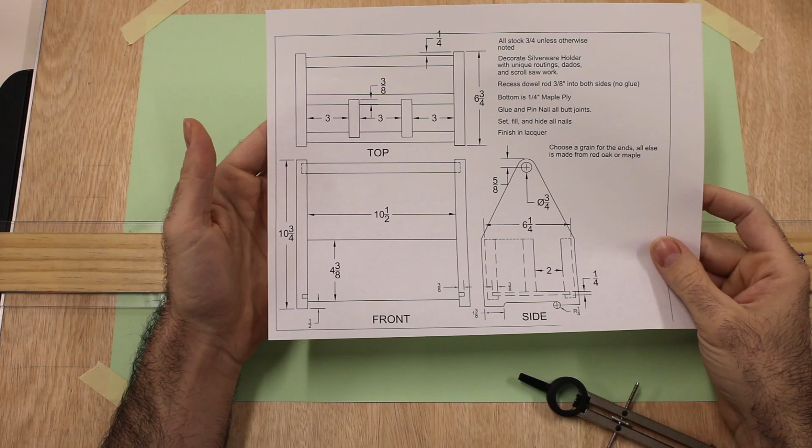So we are doing the caddy. We're doing the caddy and we're going to go down our method of making this drawing, which is your borders, boxes. You're going to erase to clean it up, details, and the dimensions.

So don't try to take all this in at once. That's a really bad way to go about this. It'll likely lead to failure. So take it one step at a time.

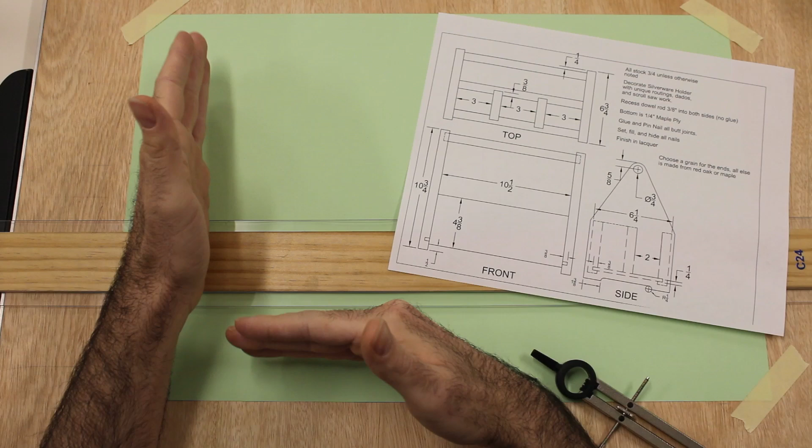So the first thing we're going to do is get our borders, and we usually do a 1/2 inch border, meaning we come off this left hand side by a 1/2 inch, we come off this bottom by a 1/2 inch, and we just create that starting position, that beginning for the whole drawing. All right, so I'm going to do that now.

Find the full scale on your architectural ruler. That's the only side that we use. The scales on the rest of this are too large for the furniture or the things that we make.

My head might get in the way at certain points. I'll try to back out so you can see, or not cover things up.

So I'm just putting down 1/2 inch lines. And as with everything, this very first step, and I'd say almost every step, but especially these first steps, make sure they're accurate, and if they're not, just erase them. That's fine. It's common to make mistakes in drafting.

I need to grab a 45-90 triangle. And now I'm going to draw my line going up the side.

So this is my first recording. I hope that you can see that line, these lines that I'm making. I think you can, okay.

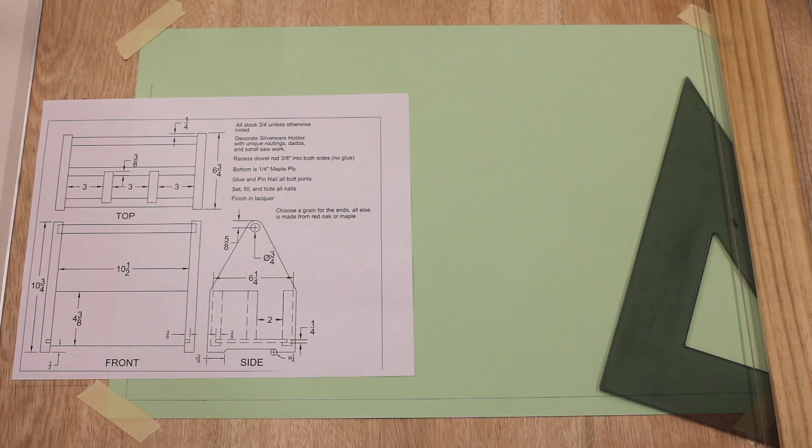And I'm going to grab me a marker and a little scrap piece of paper. Let me see here.

Before I get into this and I start to really draw everything, the way that I like to do it, the way that I find it easier for me, the way that makes it step by step so I'm not trying to juggle too many things while I'm drafting, is to do a lot of the math in the beginning.

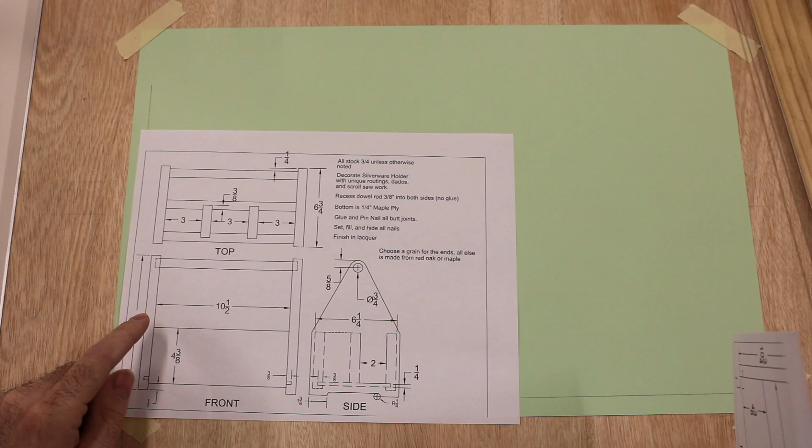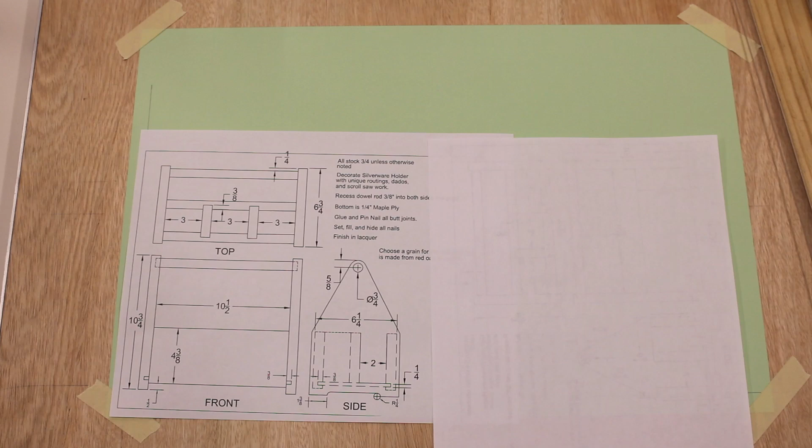So all I'm going to be doing here is this is a 1/2 scale drawing, and I'm going to be scaling all of my dimensions here. These are my final dimensions. This is how big the part actually is. So this says 3 inches here. The part will actually be 3 inches. But when we draw it, it won't fit on this paper. So we're going to scale it down to 1.5 inches, which is half the scale or half the size to draw it, okay? So to make my life easier here, I am going to go down this and let's just pull some dimensions off.

And this is what I would suggest to you too, is to kind of make some nice columns right next to each other. And you can have a scrap paper whenever you do yours.

So I think I'll go blue and red. It doesn't really matter what color you use, but I'm just kind of going to go down it. And I'm going to go through these dimensions. So I have a 1/4 dimension right here. I've got a 3/8 dimension right here. There's a 3-inch dimension.

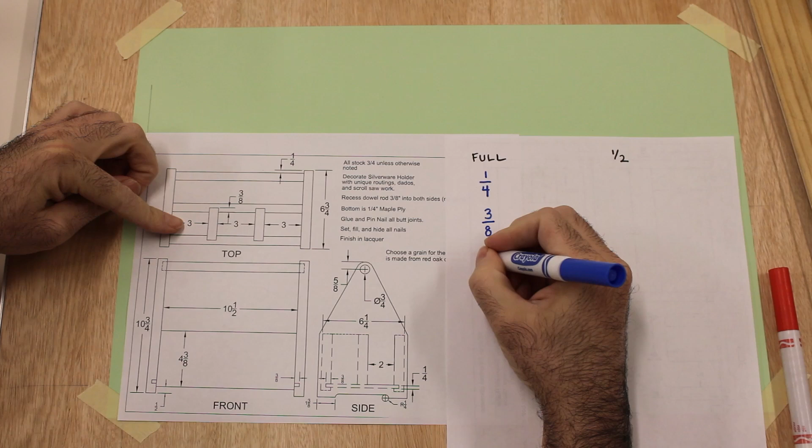6 3/4. 10 3/4. It's a 10.5 dimension. 4 3/8. The little gap on the bottom, we have a 1/2 inch dimension. There's another 3/8 here. There's a 5/8 dimension here.

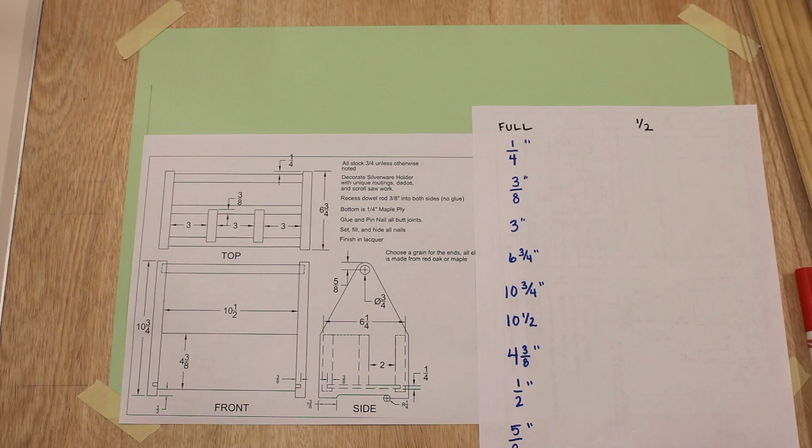And I'm going to need a little more room, just a little more.

If you're trying to juggle drawing and doing the math, even if this is something that you're good at, it's really easy to make a mistake. And once you've made that mistake, it can cost you a lot of time.

You've got to go back and erase and fix whatever that is. Everything's kind of connected here on this drawing. So what did I choose on this one? It was blue in the first column. I'm gonna go 5/8.

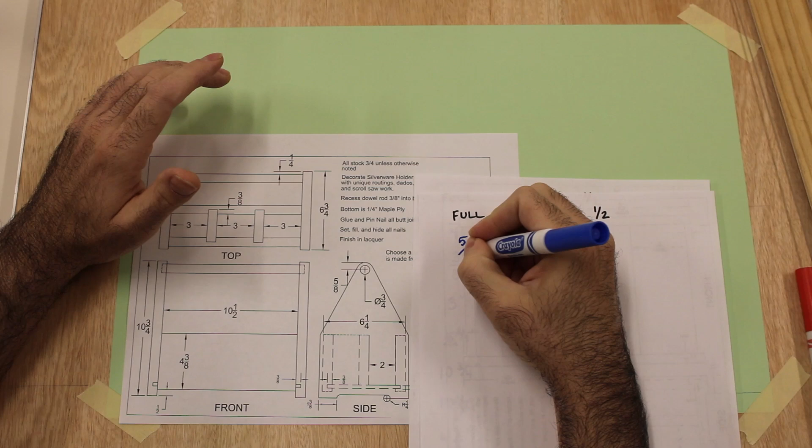That is a diameter symbol. I'm gonna keep that on here just to remind myself that was the diameter, because that's important. If you remember your compass work, you know why, but we'll talk about that when we get to it. I got a 6 1/4 dimension.

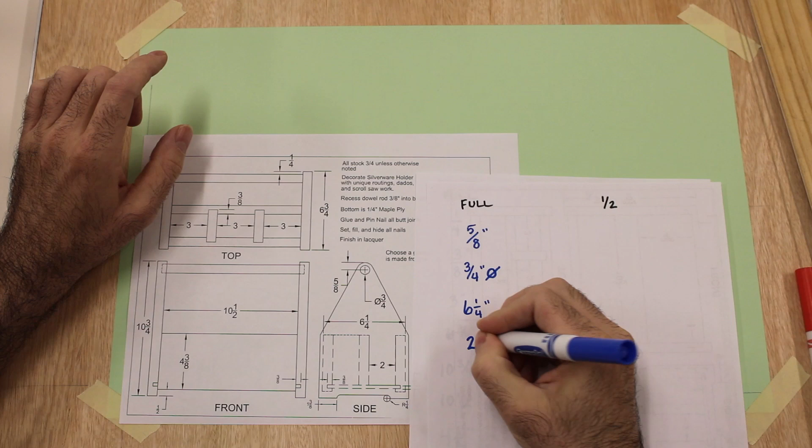I haven't had that yet. You actually start to write these out, and you can see where there's so many little points where you can make a mistake, and why it's important to kind of get this done ahead. It's a 1 3/8 dimension.

So we're just working down our fractions. We've got a 1/4. Half of my 1/4 is 1/8. 3/8, we've got 3/16. 3 inches, we've got 1.5 inches.

Here, whenever I have these mixed numbers, for me personally, I like to separate them for a second, deal with the whole number, deal with the fraction, and put them back together again. So I've got 3, 3/8.

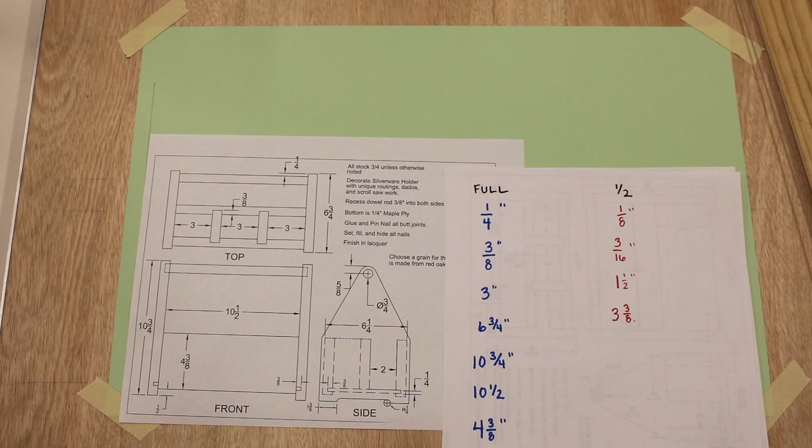So I just kind of view them here and there, even if I have to get another piece of scratch paper or write it out to the side. Maybe I'll grab an extra, we'll get a little green here in case you have to do some writing to the side.

10 3/4, that is 5 3/8. You can quiz yourself on these fractions as I'm going down, and maybe think about what they are before I get to them, and see if they're lining up or they're correct, or do you need to go back and work on that fraction work.

Ten and a half, we've got 5 1/4. 4 3/8. 2. 3/16. 1/2. 1/4. 5/8. 5/16.

Oh, I wrote the same one twice, so that's fine. We don't need to do that work twice. 3/4, we have a 3/8 diameter.

6 1/4, 3, and again I'm just splitting them up first in my head here. Half of 6 is 3, half of 1/4 is 1/8, or half of 1/4 is 1/8. Half of 2 inches is 1 inch.

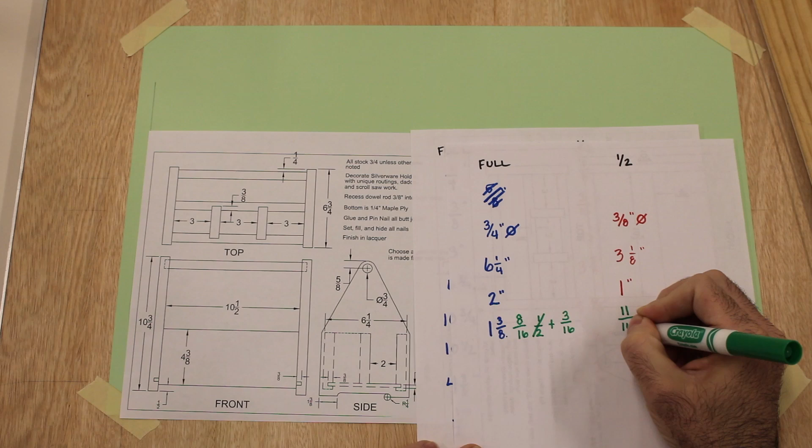This is going to make my life a lot easier, because now I'm totally focused on the drawing, and I can just come back to this sheet to pull my dimensions as I work, okay?

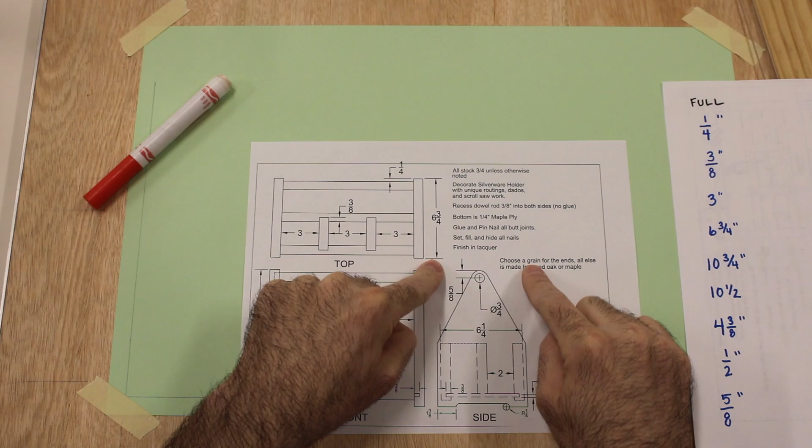And the first thing I want to do is look at this drawing. We've done borders, and the next step on here is boxes. So I've got borders, and then we're going to get boxes. Boxes meaning I just want to figure out what the outside dimension of each of these views is.

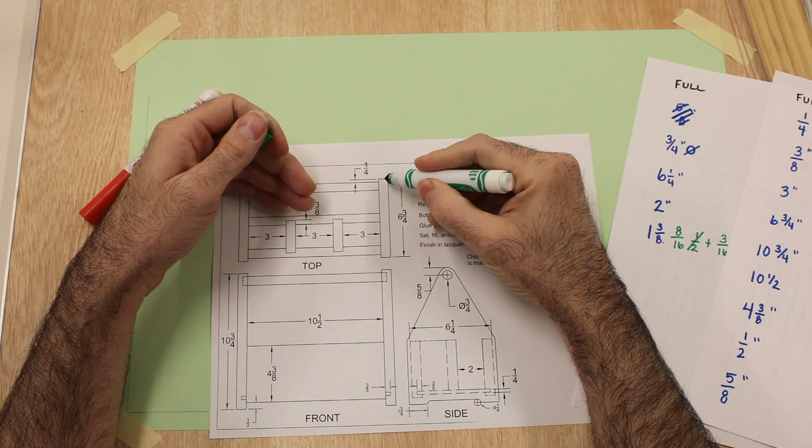Looking at our drawing, we can see that there is a height dimension here on the left. It is 10 3/4, so that's one of our first dimensions. I've got 10 3/4 tall. And then depth, I can pull from over here. It says 6 3/4. I've talked about this a few times, but this dimension right here along this edge and this dimension right here along this edge are the same dimension.

Because again, we're taking an object and we're turning it to our top view and up this way. If you were to turn that object, it would actually be better if I had some kind of box, not a cylinder like this. So I am gonna get that.

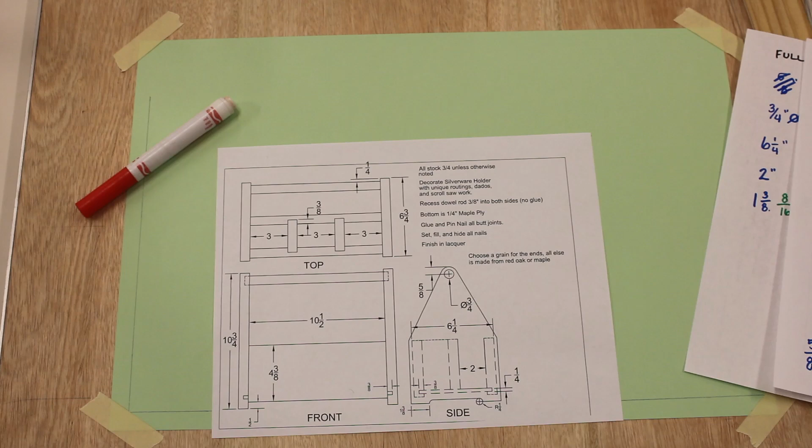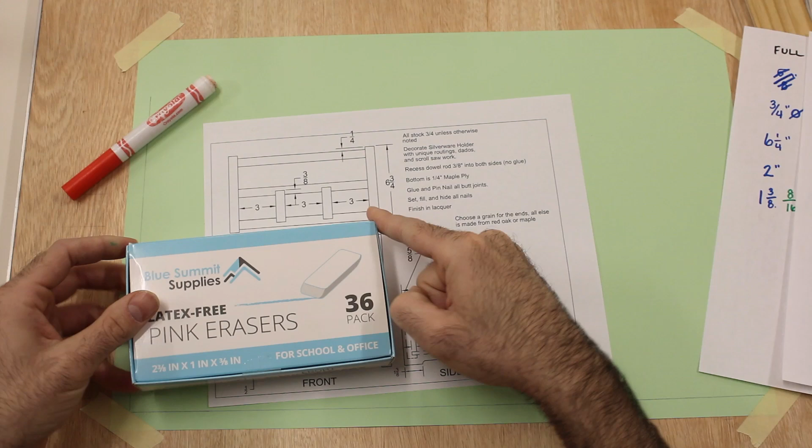This box here, we can see this would be like our height on our caddy. When I turn this, go up to our top, and I have the depth of it. How deep is this object? I'm looking down from my top and I'm looking at it, and this is how deep it is. So I'm going to put my finger here so you can see when we switch back to this front view. That was that dimension we were talking about.

You can't really see it from the front view anymore. You turn it up this way on its side, and you can see we're still on, my hand hasn't left right there. All my erasers are falling out, that's okay. So this edge right here, you can see how those share, they're the same exact dimension. It's just showing it from different perspectives.

So I've got a 10 3/4 tall, 6 3/4 deep, and get this on my top view. I can get my width right here. The last thing I'm getting is this length.

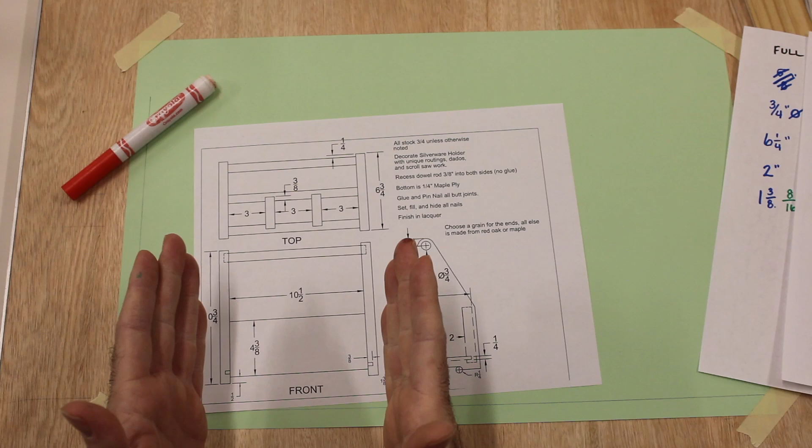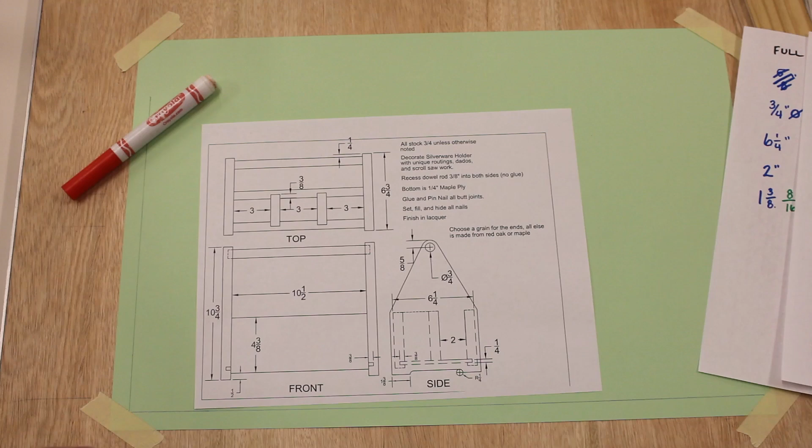It's often in engineering drawing that if math can be done, they're not going to give you every single dimension. You're going to have to do a little math to get to it. So if the math can be done, there's going to be less dimensions. It's like you take this dimension plus this dimension to get what you need. The reason for that being, if I put all my dimensions or I just keep rewriting things, it gets messy. I try to put as minimal amount of notes on this drawing, I guess, as I can, so that it's still pretty clean and you can look at it.

So this is what I do. I'm looking for the length, which is along this edge right here. I would not find length in this side view. I could find length in the top or the front, so I'm going along this way.

And if you look down the dimensions given, you're going to find a dimension that kind of gives you most of it. Maybe you find a dimension that gives you the whole length across, but my eyes go straight to this 10.5, which is from this inside edge to this inside edge right here. It's like most of the length except for the two little side pieces. So it's 10.5 plus whatever this is and plus whatever this is. And if I look around, I don't see any notes or dimensions for those.

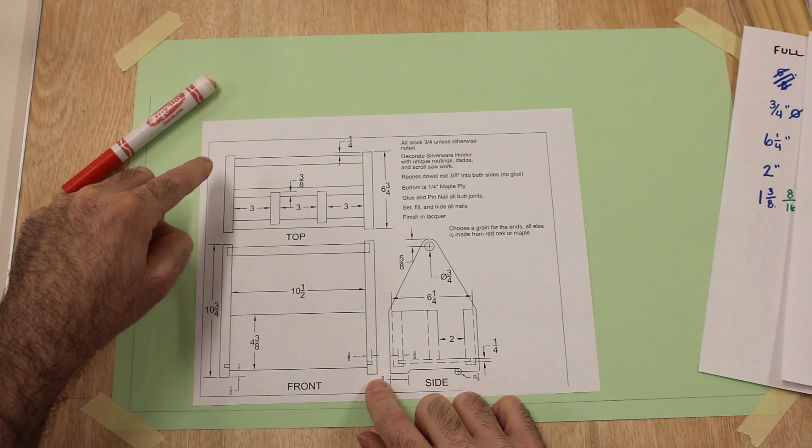But if I go up here and I read these little notes are important. They've got a lot of information about the build. The very first thing I see is it says that the stock is 3/4 unless otherwise noted. So unless it says something else, unless the thickness says something else, that piece is 3/4. So whatever you see on there. Again, it's just an easier way. Instead of putting 3/4 all over the place, just telling you that, hey, everything here is 3/4 unless the drawing says otherwise.

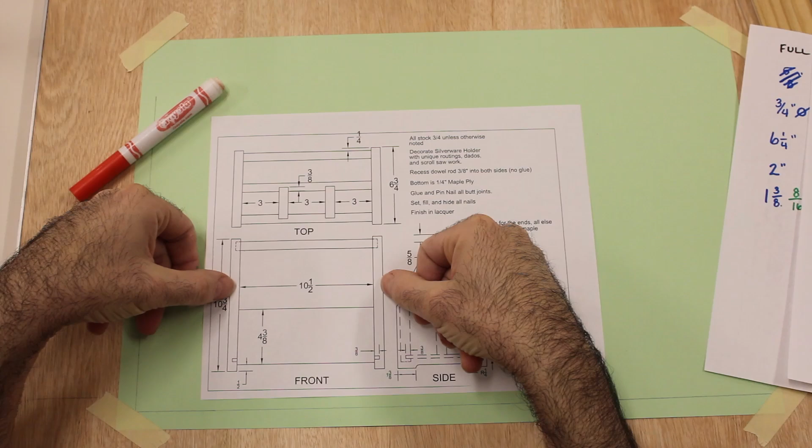So I'm going to take my 10.5 and I'm going to add 3/4 and I'm going to add 3/4. So we've got 10.5, we got 3/4, and I got 3/4. I'm going to put this in green perhaps down here. Oh, I should change the color of that one too. Still 11/16, just trying to make it clear about what is what.

So we got a little bit of math to do. I got 10.5 plus 3/4 plus 3/4. Three-quarters and 3/4, 10.5. If you can, you could add them all up. For me personally, I like to take it piece by piece. So I would either add these two and then add that one, or I'd add these two and then add that one. Just because I know if I make a mistake here, it's going to cause me a lot of grief in the end, and I'll have to go back and erase everything.

So I'm going to take 3/4 and 3/4 and add those together. So 3/4 plus 3/4 is 6/4. 3/4 plus 3/4 got 6/4.

This is an improper fraction, there's nothing wrong with this fraction, but in construction math, we don't have this larger number on top. We're always going to work that whole number out, reduce it down to its smallest fraction it can be.

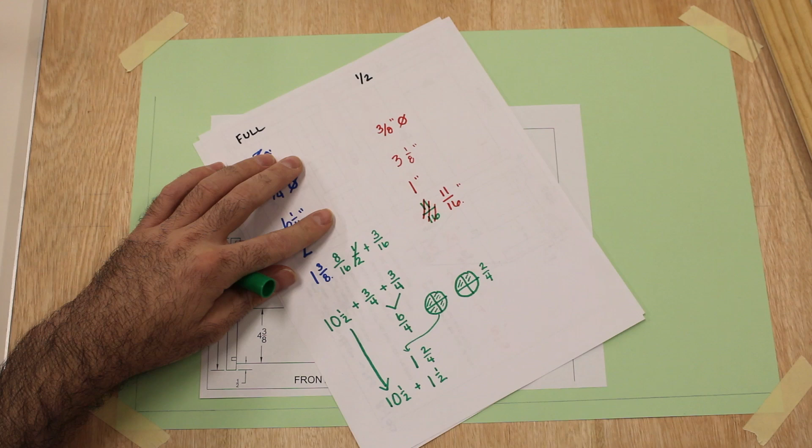So 1 1/2. Let's drop this down, because we've got to add that 10.5 in there now. Ten and a half plus 1 1/2. Personally, I like to split the whole numbers and the fractions up and deal with them separately, or if you can do the mental math straight, just go for that. This one's not too hard - we've got 10 plus 1 is 11, half plus a half. So 11 plus 1 is 12 inches.

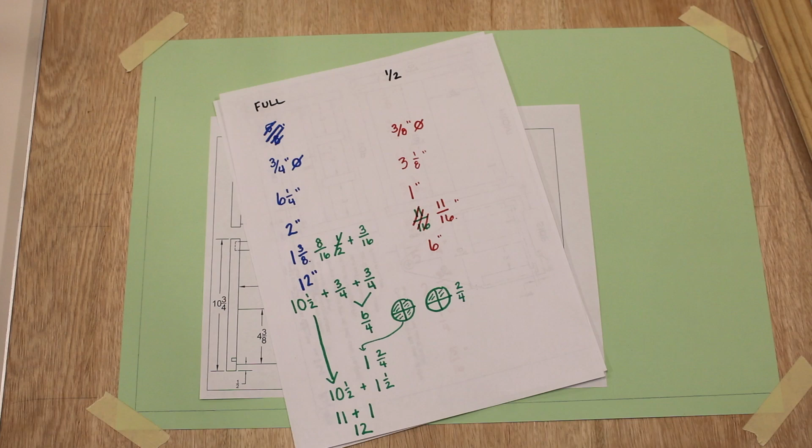So I'm going to add this onto our list here - this is 12 inches. Half scale is 6 inches. Ten and a half plus 1 and a half equals 12 inches. That told us that this 10 and a half plus this 3/4 plus this 3/4, put it all together, and I've got 12 inches from end to end here.

So after all that math, now we're really ready to start drawing. Now we can make boxes because I've got my 3 dimensions: 10 3/4, 6 3/4, and my 12 inches.

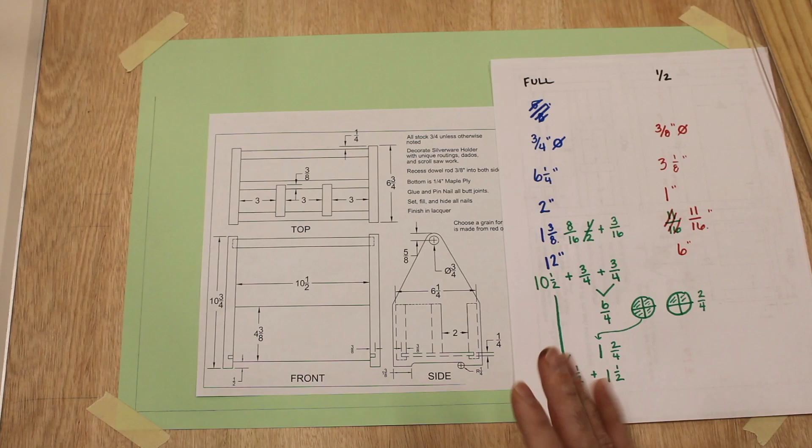One of the bigger mistakes I see is jumping in way too fast with no plan - meaning I didn't do all this and I'm already starting to draw everything, and I'm super confused because I'm trying to do math at the same time I'm drawing, or I've already messed up my thing. Get all of this mental math stuff, get all the math done first. Then come over and make your drawing.

Ten 3/4, and my chart's a little off camera here. Let me see, well, I could try to pull that in there. I've got 10 3/4, it's 5 3/8. So I'm going to start with that first. I'm going to make a line at 5 3/8 of an inch.

Small detail - my tape was coming up at the corner, and I can't really see where the corners come together. I just need to fix that real quick. These are small things that might happen to you. Slow down to speed up - get it done right so you don't have to redo it. Take the time to fix up little mistakes; they will help you. So we're right here, and I'm going up 5 3/8 now.

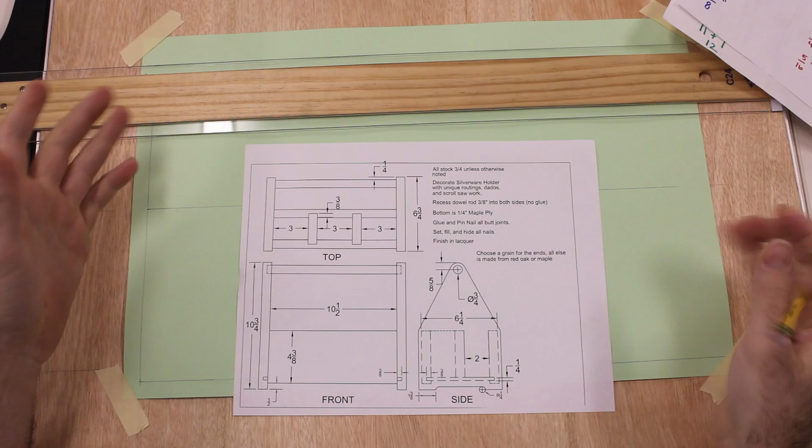Okay, so we've drawn a line across here at that 10 3/4 mark, and we're going to get the other sides of our box done up. I'm going to do the width here, which we determined was 12 inches. On the half scale, that is 6 inches. So we're going to come across here 6 inches and lay that dimension down. Make sure you've got the right side of your ruler - it's just the standard side.

So I'm ticking that off at 6. I've got a little mark here at 6. I'm going to draw this going up all the way, but I also need a 1 inch gap between my front view and my side view. So I'm going to go ahead and put that tick mark on there too. I've ticked it at 6, and I'm going to tick it again here, 1 inch over, and I'm going to draw those both at the same time.

Oh, got a little mistake there. I'm just going to go ahead and fix that.

If my head gets in the way, I'll move it so you can see. I do have to kind of lean in here a little bit, get close, and find my measurements. So 6 inches, and then we have a gap, and then we have our side view.

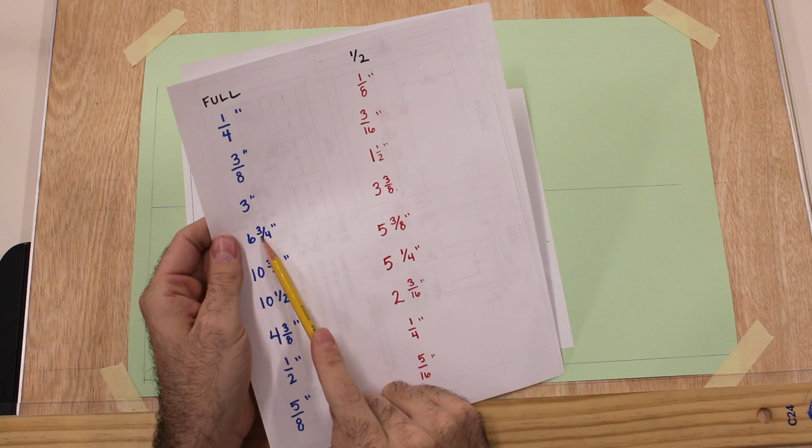So here's our side view, and we found that was 6 3/4. And we go back to our math here that we filled out, and we've got our 6 3/4 on the half scale is 3 3/8. I'm going to scoot that over if I can get this piece of paper up. Set this over here, 3 3/8.

It works in your benefit to remember that this side and this side are the same dimension, because now I can come in here

and take that. Oh, that's actually incorrect. I've got to put my 1 inch gap between my parts here. I tried to put the 3 3/8 in there to start. I'm going to go with my 1 inch gap.

I'm going to go up 3 3/8. This line's not long enough, so I'm going to come in here and extend that just a little bit, go up a little bit higher.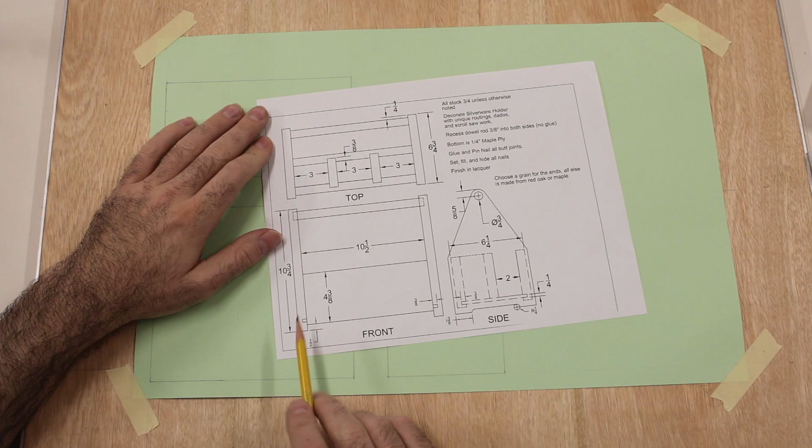So I take my 90-45 triangle, my T-square, and draw vertical and horizontal lines going into the other views. I'm going to start with the sides, and here's our sides right here — they're 3/4 of an inch thick. We're working a half scale, so that's 3/8 of an inch.

So I'm going to come in here and draw over 3/8. I'm going to draw from here over 3/8 and make our two sides, which you'll see in the top view — I can carry that up, I can carry it into the top view.

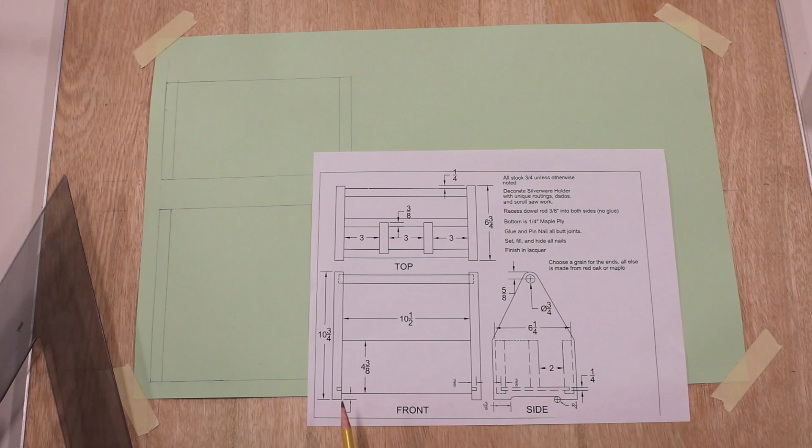Okay, and now I'm going to add in this 1/2 inch gap below and the 4 3/8 above that. So just working my way around, putting in as much as I can, and I'm going to add those lines very lightly into the side view as well, because they do come up later. But I'm going to put it on pretty lightly because a lot of them are going to get erased.

So this 1/2 inch mark here and this 4 3/8, I'm doing the bottom and then the height of the side — so 1/2 of an inch.

Make that tick mark right there, and I'm going to go up 4 3/8 from there. The way I'm going to go about that actually is I'm going to line up 4 7/8 down here in this corner. I mean, if you just want to measure from here 4 3/8, that's fine. I find it's good to have them both kind of lined up one after the other — it helps make it just right.

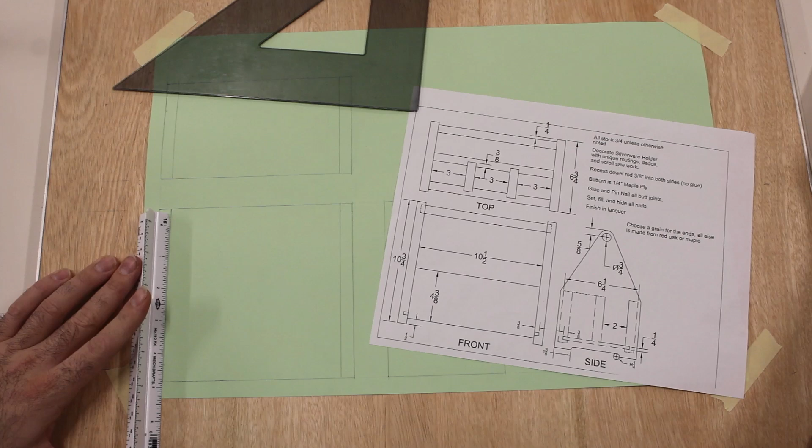And oh, I'm forgetting one thing — oh, and I forgot two things actually. This is easy to do, let's see if you get distracted for a second. That's why we split all these up.

It's a 1/2 inch, but we're going half scale, so we need to put our 1/4 inch right here. And then it's 4 3/8 is 2 3/16. So I'm going to correct this now.

If this happened in your drawing, just go back and fix it — 2 3/16. This here's 4/16, so 2, okay.

So I measured up 1/4 of an inch — got 1, 2, 3, 4. And I'm going to go ahead and go up to, from that 1/4 of an inch line, I'm going to go up another 2 3/16. I'm going to mark a line, and I need to get rid of that 1/2 inch line that I made incorrectly there.

Again, it happens — just pay attention to your details.

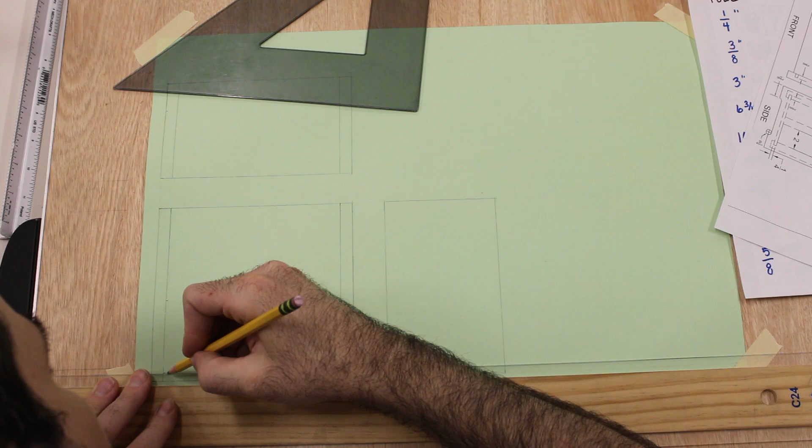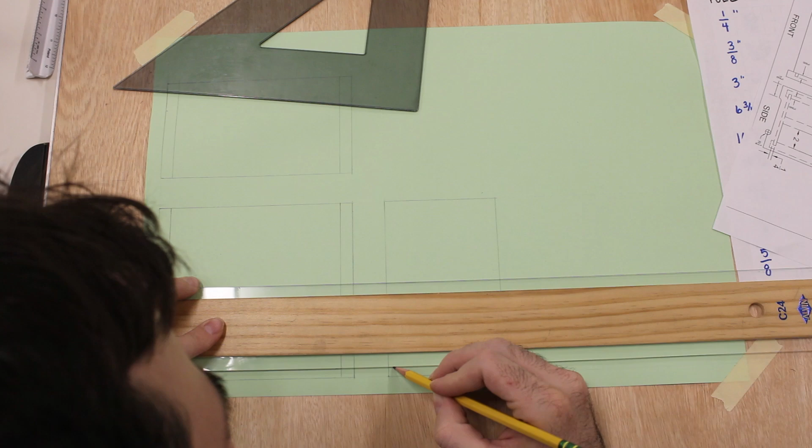I'm going to very lightly pull them over into this view. I should have gotten this one at the same time, but I didn't. It's okay, I'm just going to line it up and very lightly draw it over into this view.

So from here we really have this dado on the bottom, and then we have this dowel rod, which if you remember this drawing, is easier to draw in the side view and then bring over.

Okay, so we're going down 1/8. I made a tick mark right there at 1/8, and I'm going to tick mark up from 1/8.

Some of you might remember the strategy of doing this little 45-degree line. If you do use it, I'm not going to do it in this video just to make it simpler. We're just going to measure and mark all over the place. So I've got that 1/8 mark, and then I've got my two outside dividers here that I'm going to draw in. All stock is 3/4 unless otherwise noted here in my notes.

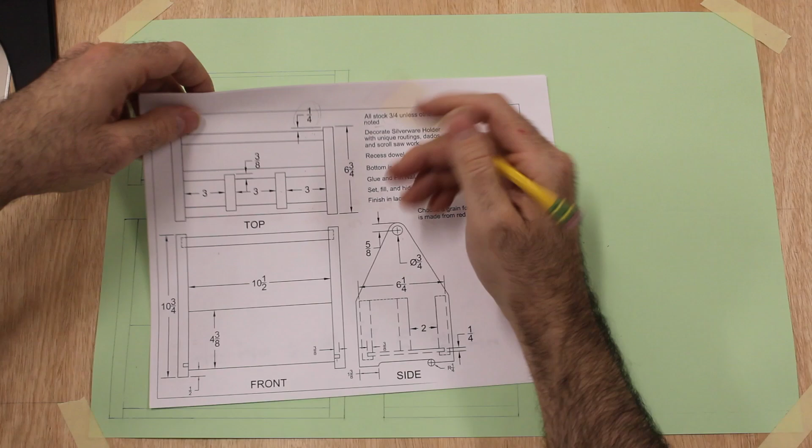So this piece and this piece here are going to be 3/8 of an inch thick. So I'm going to mark that now down. And to be clear where I'm going from, it's not from the top, it's from that line I just drew down. So I went down 1/8, and then I'm going to mark here 3/8 down from that line.

Next step is sometimes a little confusing for students. They don't know where to put this one right here. So this divider is in the center, down the middle of that top view.

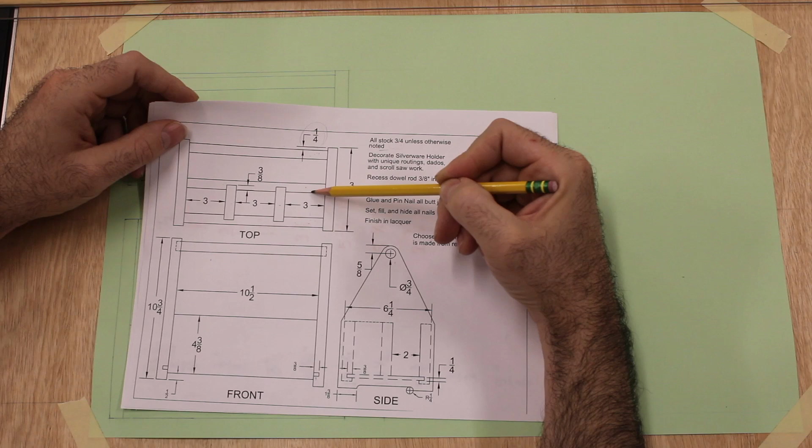And we can do it two ways. I kind of prefer one more than the other. If I look at my views, I can see there's a 2-inch gap between my outside divider and my center. So this is a 2-inch gap here on both sides. So I could measure up 2 inches, which half scale, that'd be 1 inch, and mark that down. Just to get it a little more accurate, I like to go down the middle and go to this 6 3/4 dimension and mark the center, and then mark my middle from that.

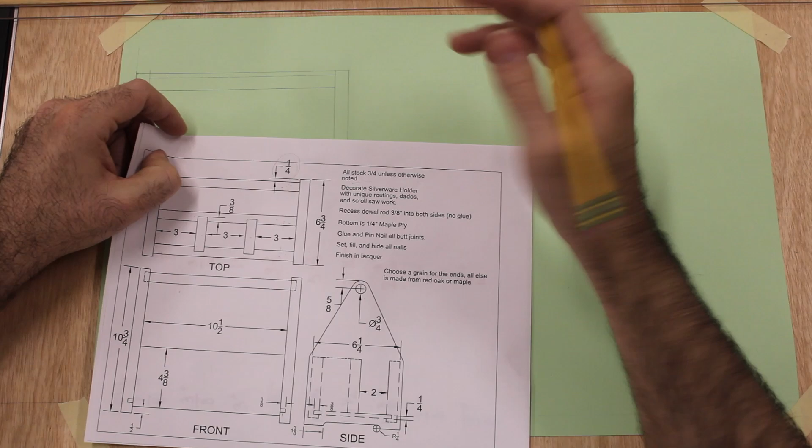So there's more than one way to get it done. I'm just going to show you the way that I prefer. So 6 3/4 here, that measurement, we're looking at our math here, 6 3/4, that is 3 3/8. But we're going to find the middle of that. So the middle of that is going to be, oh, we got a little more math to do here.

And I like to split these up. I always do that with my fractions. 3, half of that is 1 1/2. And half of my 3/8 is 3/16. I'm going to convert this into 16ths, and then I'm going to add it back together again.

I really prefer to show all my work with my math just because a little mistake will cost you a lot, and it's kind of better to get all these out. Especially with fractions, I feel like they're better done on paper than mental math. If you can do that, great. If you can't, don't be shy about putting it down on paper.

So that's 1 and 11/16, 8, 9, 10, 11. So we've got 1 and 11/16. This is the dimension that's going to be the middle of this right here.

You may have to adjust some things on your table. 1, and then we have 8, 9, 10, 11. Okay, and then I know I'm going to need this midline later, so I'm going to bring it over here and just go ahead and do this both at the same time. 1 inch, and then we have 8/16, 9, 10, 11.

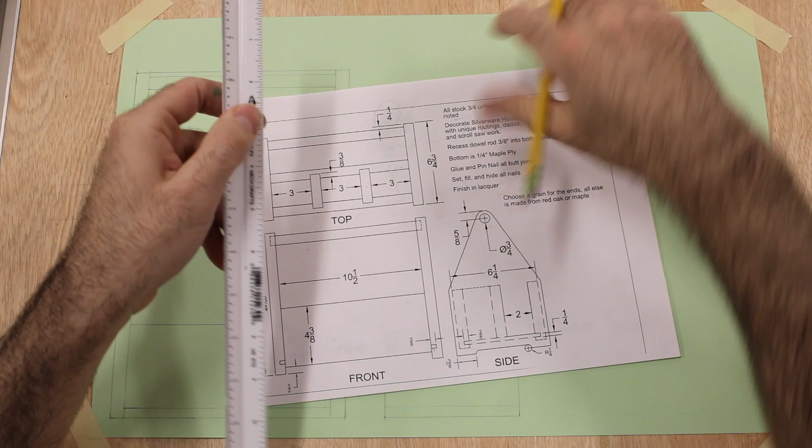Tick that off right there.

I wish I had more time to zoom in on some of these views. I'm just trying to get this done before the final so you'll have something to look at, something to study if you need it. I know explaining some of these things might be a little confusing, so I'm trying to do my best about explaining how they go down. I hope you're able to see in your head what I'm explaining, from this kind of backed out view on the camera.

I had a midline here, and then I've centered 3/8 over the top of it, and now I have a middle, a center right there. So we're not doing too bad. Once you have those boxes up, it does start to move, and once you have this up, those boxes are what's critical.

So we're gonna get this now, or whatever you're gonna get. The little dividers - we've got the smaller dividers, they're 3 inches between each other. So I'm going to work in both ways here. It says 3 inches, half scale means we're going 1.5 inches on either side. And then we have 3/4 panels, so we're going in another 3/8 and mark all of that.

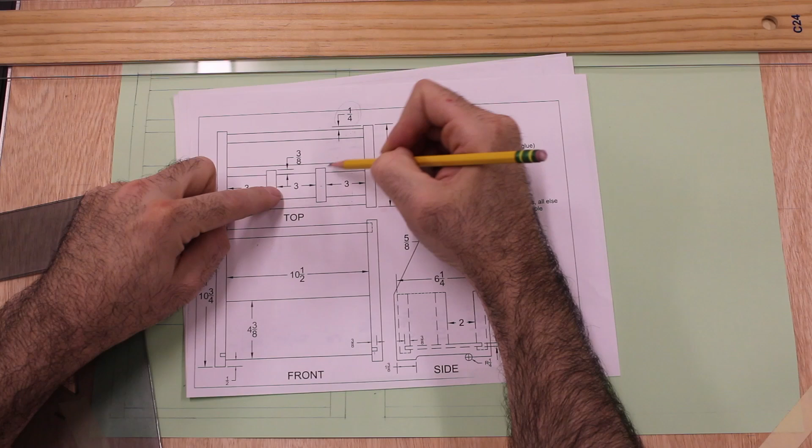So we've got those put in pretty quickly. The next thing to do is the dados. You remember these short dividers, they dado into the long dividers, and you can see here it's 3/8 of an inch. So I'm going to go in here 3/8 of an inch all around.

So if you're kind of putting some things together here, we made a midline here right down the middle of that panel. That panel is 3/4, so this 3/8 line right there would come straight to the middle of this one. Well, we already have that mark - there's a marking here for that middle. That's kind of why I like doing the middle here too, it makes it a little easier.

So that 3/8, I'm gonna line my T-square back up and mark me some lines here at that 3/8. This one down here I'll have to measure. Dado's in 3/8 of an inch, I'm gonna measure down my 3/8, which on our draft is half scale, so we're going down 3/16. We're doing our half scale down and kind of connecting this all up.

So I gotta find the middle of these two panels, draw some lines going across, and then pull the divider lines up to connect to them.

And I'm just using some of the old lines I had there. I already had those 2 tick marks done for the middle, see how quick that is since we already had everything finished. Now I'm just going to come down here and measure 3/16 of an inch.

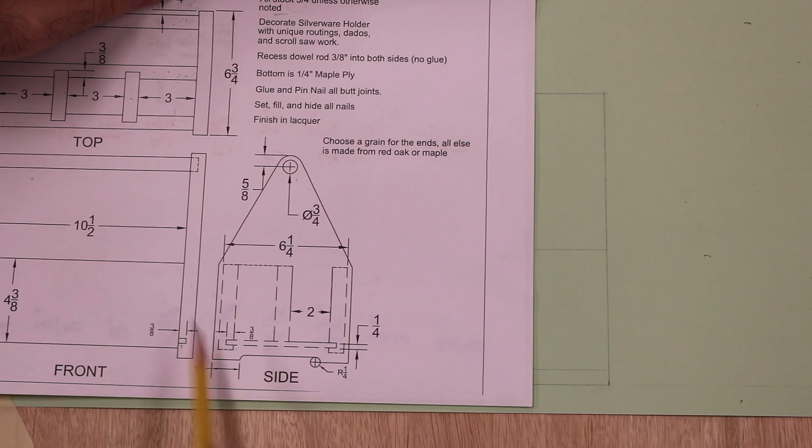We're still working on details. So we're going through - there's a lot of lines going on here, and if you try to take it all on at once, it's going to be really confusing.

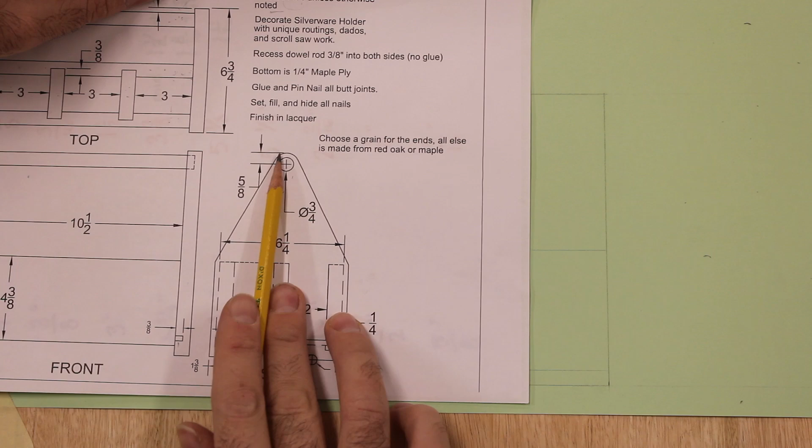So let's break it up and first start with, let's get some kind of circular something going on up here, and we'll work our way kind of down on this piece. So that's where your dowel rod goes in, and you also got that little semicircle shape on top.

And this is compass work, but you need to give the compass a center point, of course. It needs somewhere to stab down and somewhere to put the lead onto to swing it around. In our drawing here, it's got this 5/8 dimension, and it also has that line right down the center, which if you look back, you remember we ticked that mark.

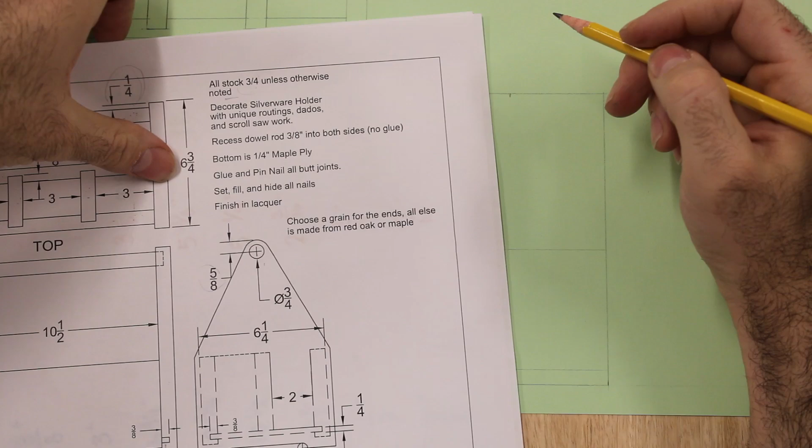We found that center when we did it up here in the top view. It's also here, so I already had one that I just put in there to use for now. I'm going to extend that down just a little bit, and then I'm also going to put this 5/8 - what it's telling you is not the 3/4 circle, but this semicircle here. I hope that's focusing. This semicircle here is 5/8 down to the center of that, and then both circles, if you see those two circles there, they both share that same center point.

So the 3/4 diameter is going to go there, and this 5/8 radius circle is going to go there. It does you well to kind of keep up with who's who and whether you're working with radiuses or diameters. It might be smart to write some things down and say, hey, this is what this is. Or take it one step at a time. Don't rush through this part.

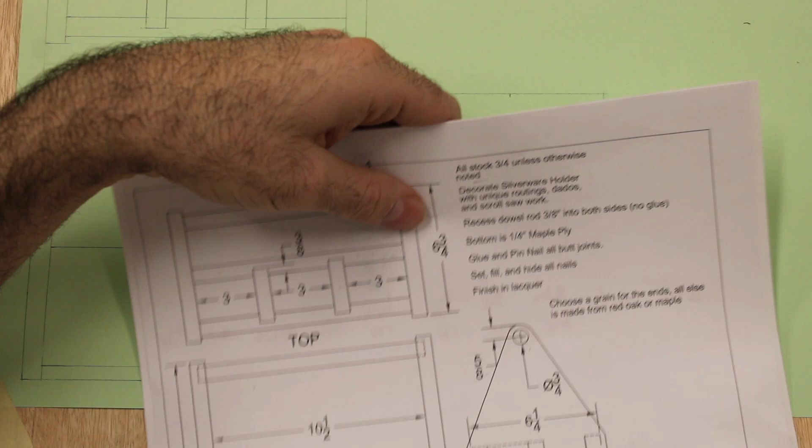So 5/8, we got 5/8 down. We're working in half scale, so that's going to be 5/16. So that's what I'm going to do, is just get my crosshair set up.

Okay, so I got 5/16 down, got that center line, and now I have a central circle to go onto. I'm gonna go ahead and start setting up this compass and drawing this half circle here. So I'm gonna stab this down in that center point, and I'm gonna line my lead up with the top where the center line meets the top, because that's our 5/8, which it's 5/16 in half scale that we're looking at here. So I'm stabbing this down.

If I can kind of hold that in such a way so you can see. So now I'm just gonna go, oh, and that might do that. So we get those halves right there, or that half circle.

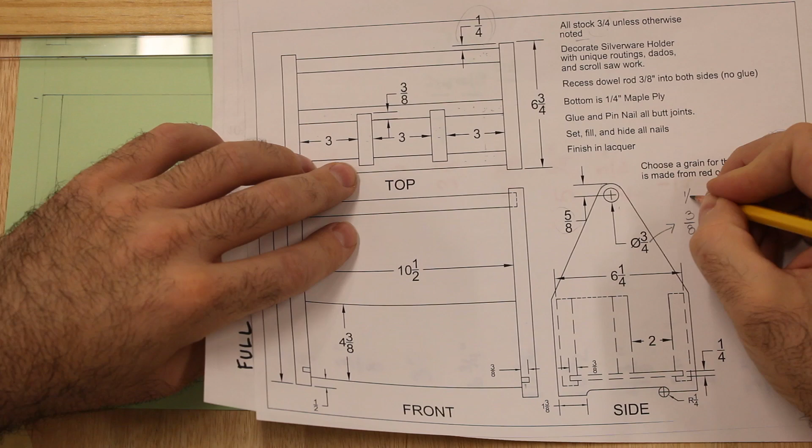Oh, I think I got that backwards. It's a 3/8 in half scale. Let me back up here. I don't want to confuse you. What I said is true, I just did it out of turn. I did the wrong step.

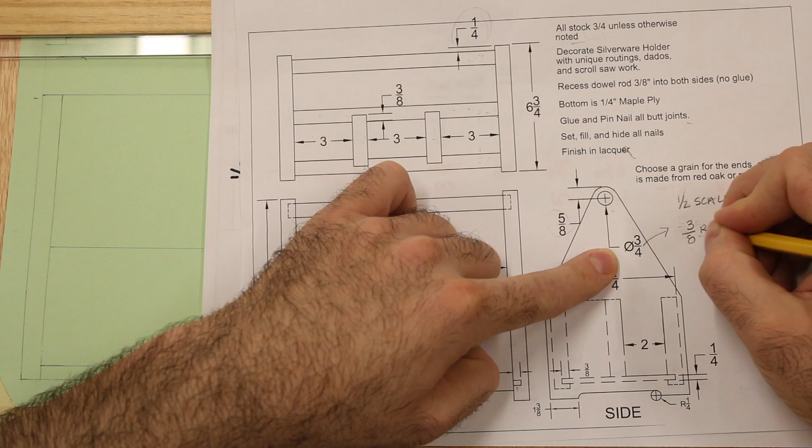3/4 diameter. We're working in half scale, so in our half scale it is a 3/8 diameter. I need to put the diameter symbol there. I need, or we both need, the center point, the radius for that circle, not the diameter.

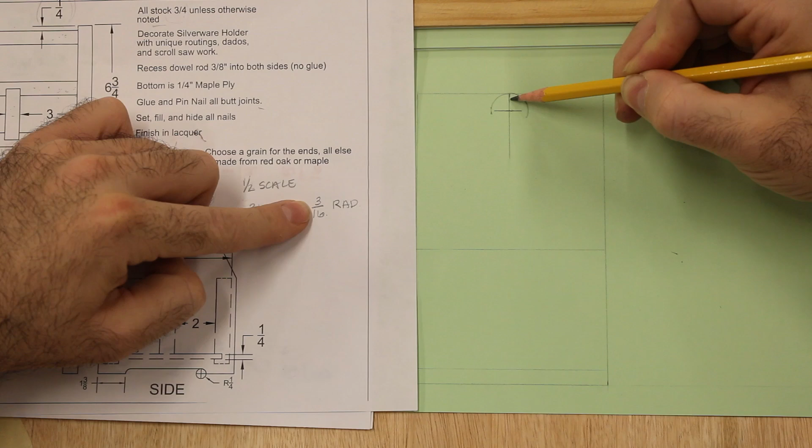So we've got to split this in half again. That's going to be 3/16 radius, and that's going to be what I need to draw down here. So what does that mean? I'm going to go right here from the center point, and I'm going to go 3/16 and make a tick mark. So I'm going from that center point there, 3/16 out, and marking a tick mark, and that's where my lead is going to go.

I'm just lining my ruler up from the crosshair and then going 1, 2, 3/16.

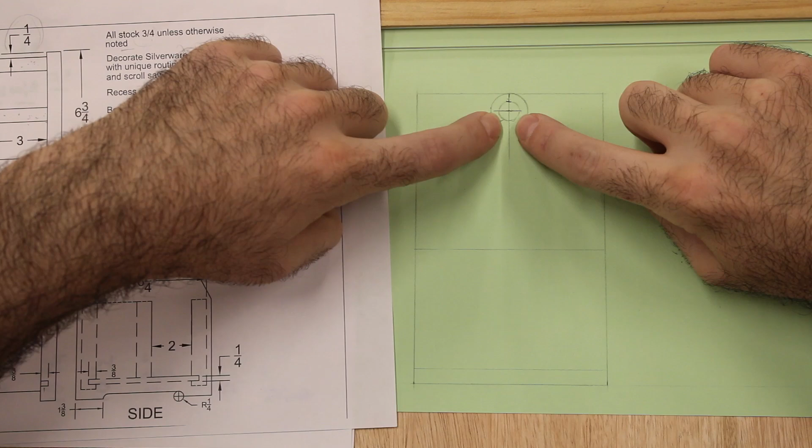These smaller circles, it does take a little care trying to get them marked down. They can be kind of a pain sometimes. Okay, so I've got a half circle here drawn, and I've got that 3/4 diameter circle there drawn. And that's our full scale dimension. That shows our dowel rod, that shows the top of our side.

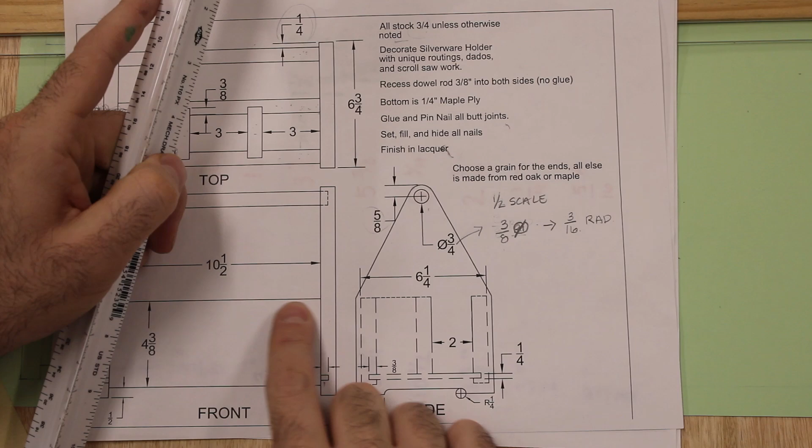And we drew this line in here earlier, which is just the height of the divider coming across. Well, this works out in such a way that where that divider comes across is where this slope starts, and the slope ends right there where the circle is.

So that sounds really complicated, but all we're saying here is get your pencil, get a ruler, and put your ruler here at this intersection. And I like to put a pencil right there too - it kind of helps as like a stopper. So I'm holding this pencil there, and I'm gonna push this ruler up against it. Then I'm gonna push my ruler over until it just touches the edge of this circle right here, like as if the circle was a real thing and it was stopping it. And once I have that, I'm gonna draw a line down.

Let me try to get this from this angle to make it clear.

So, one complicated part down. I'm going to take this moment to bring the dowel rod over into the front view, and I'll do that by lining my T-square up on the top and bottom of the circle that we drew for the dowel rod.

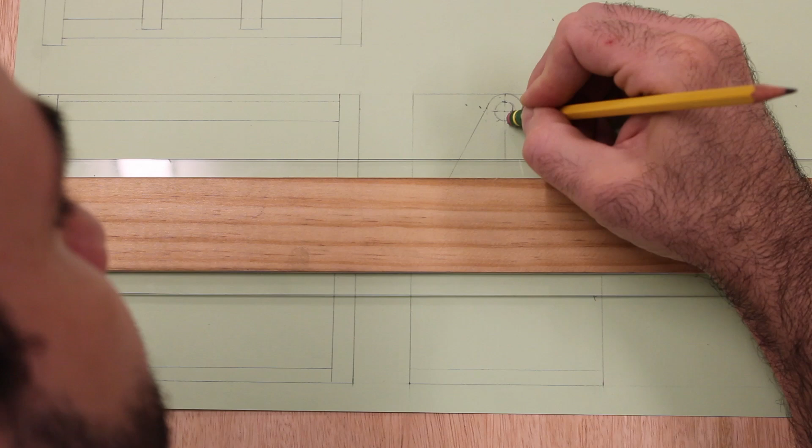Once I do that, I can clean this up a little bit in here. Don't really need all these extra lines. That might even mean coming back and darkening that up later. So you can see it starts to come together, taking it in little pieces at a time.

And we've pulled this over into this view here. I'll come back later because this is not done. We still need to show how this dips in and those dowel rods with hidden lines go into the sides. But continuing on with the side view, I'm dropping down from there and I'm going to put my dividers in right here.

So I'm going to draw the dividers in, which are these same three dividers here, here, and here. I'm going to draw them into the side view here. We've done this already - we did this in the top view where we figured out that 1/8 of an inch, then the 3/8, then the gap and everything. So I'm just going to repeat that down here and work my way across.

So we have the gap, and I'm going to put that 1/8 inch dimension there.

You may want to back up in the video if you're wondering what I mean by we did this already. When we put the dividers in up here, we measured them all out, did all the math, and knocked them in there. I'm just going to draw them in here now - you may want to go back and visit that to see how it was done.

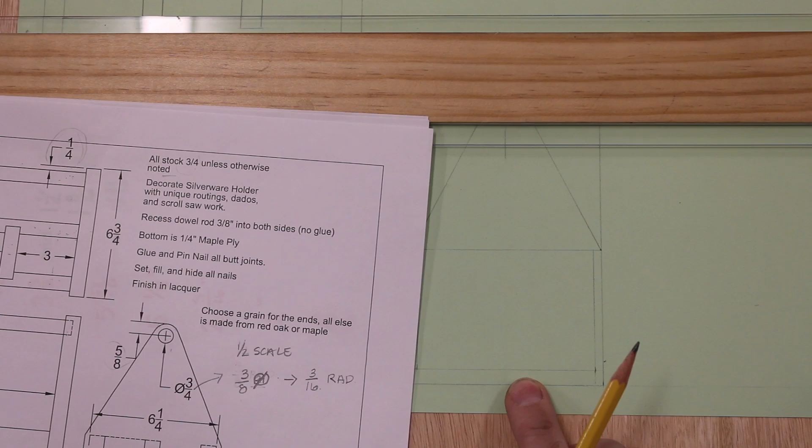We had this 1/2 inch mark from earlier, and that's coming in handy now because that's the bottom of my divider here - there it is, and there it is again. So that helps me make this box. I like to think of this as a drawing within a drawing, so it's the same steps: borders, and then making a box.

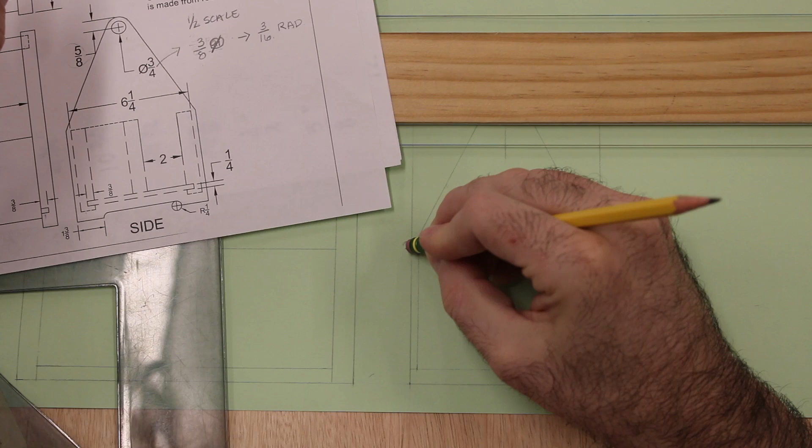And then I'm going to erase. It's like a little mini drawing within a drawing, so kind of isolate it - don't think too much about everything else going on, just focus on this part. Now we're going to go in with the side dividers, middle divider, and then I'll talk about the bottom panel.

I'm going to use that center line from earlier. Now that the dividers are drawn in, we're going to put in this panel. I'm kind of thinking about the panel on all sides, so I'm not just thinking about it as lines, but as a piece.

So when I say panel, I'm talking about this 1/4 inch panel - it's the only piece that's a different thickness than the rest. And of course our note says 'unless otherwise noted' - well, there's our note, it's 1/4 inch thick.

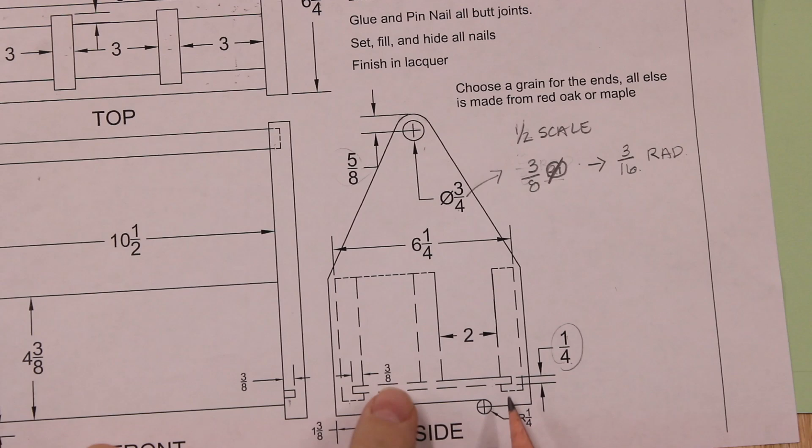It's going to go into our divider right here, 3/8 of an inch - we can see that dimension there. It's 1/4 inch wide, and there is a dimension missing here. This is kind of - always raise your hand if you have suspicions about that.

Something that I need to get fixed. But basically from that bottom - I'm not talking about the actual bottom of the part here, I'm talking about the bottom of this divider here - that is a 1/4 of an inch right there as well. So a 1/4 and then another 1/4, and since we're working in half scale, that's an eighth and an eighth.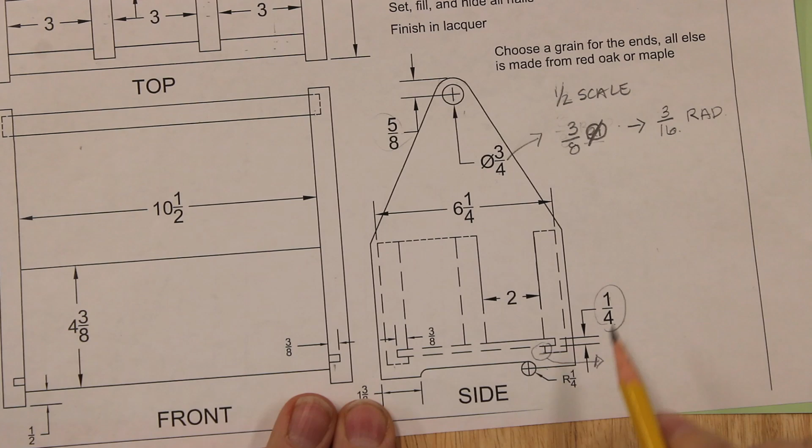So we're just going to put some rough lines in, and you're going to see me draw this dado in here, which is for the bottom as well, at the same time. It might be a little off camera, but know that I'm also going to do the other side of it too while I'm doing this one. So I'm drawing this all at the same time - it's going to make it a lot easier for myself.

So I'm going from this bottom here, of course getting my ruler on the right side.

And I went an eighth and an eighth. We have to look at how this goes uniquely. It goes a little bit into this panel, it doesn't go all the way to the side. It goes underneath this center one, and then into this side one. So I need to draw that the same way on my drawing here.

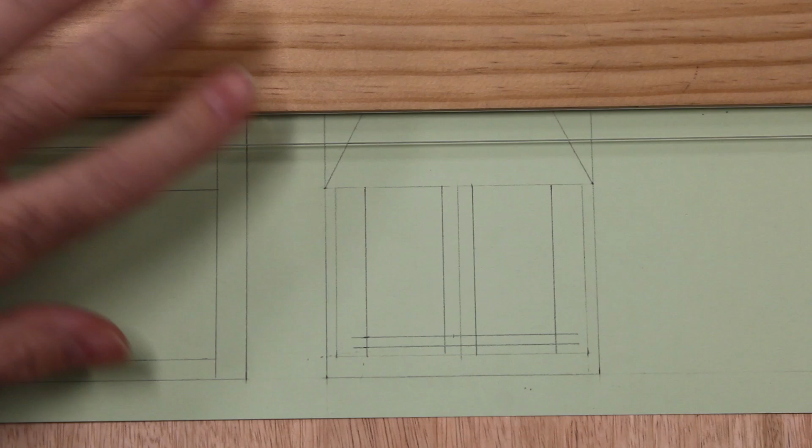I'm just gonna put in, again, some construction lines, real light, because we need to erase in a minute. I'm going to take this opportunity to clean this one up just because there's a lot going on in that little area there. And I'm going to bring this over into my front view.

That dado there goes in 3/8, that dado there goes in 3/8, that dado there goes in 3/8. So I'm gonna make a series of 3/16 tick marks to do the vertical lines going the end of the panel, to show the end point for it.

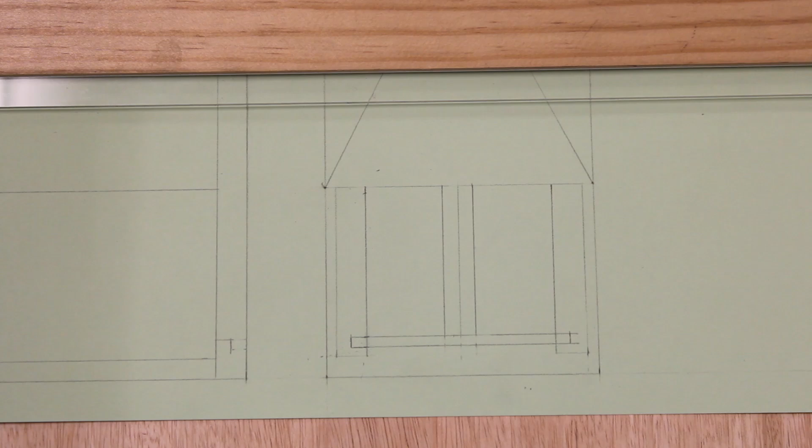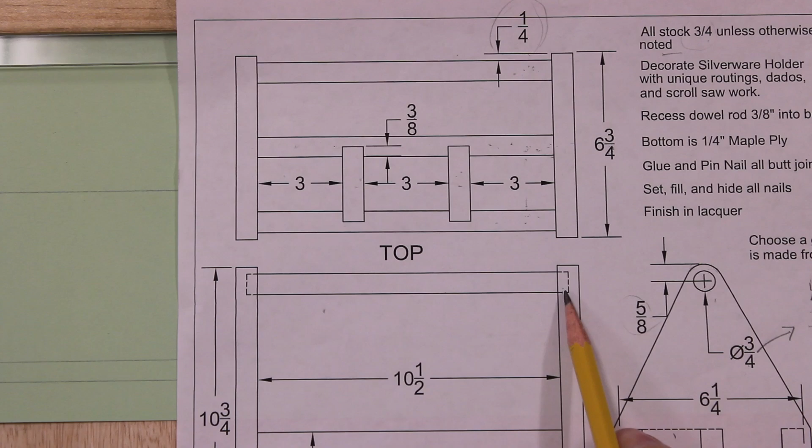If we look at our drawing here, one compartment has a small divider, one does not. So we need to knock this line out. I'm now done with my center line. I can get rid of that, and everything starts to pop out at you. You can see everything here. We really have two details left, which is this little nibble at the bottom here, and then we're gonna do this drill hole for the dowel rod in the top.

So in the bottom here, I have the dimension showing 1 3/8. That we already worked out on our math here. 1 3/8, half scale is 11/16.

Okay. 8, 9, 10, 11. Eight, 9, 10, 11.

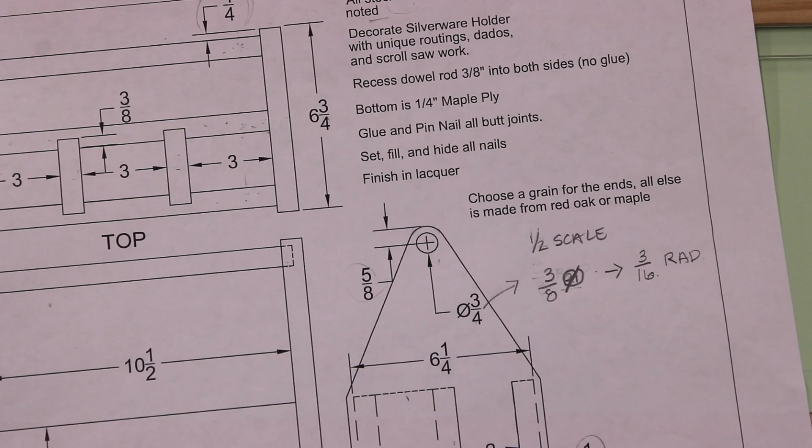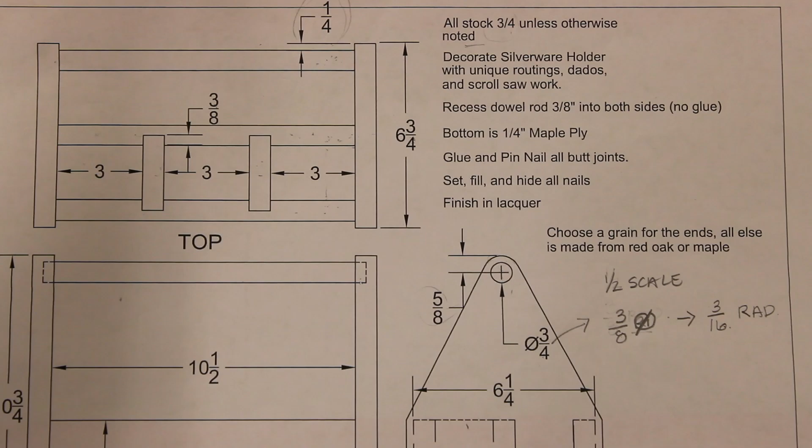There's a 1/4 inch radius mark here, and that tells us that the height of that cutout there is 1/4 of an inch, because the circle is centered up around the bottom. The upper half of the circle is what's showing missing, and if the radius is 1/4, then that's 1/4 there too. We're working in half scale.

Now, do you need to mark or compass these little 1/8 inch circles out? No, there's another tool for that we don't have in class. I don't have a set yet. So for these, I just have you pencil them in. It's not proper, it's not the right way to do it, but that's the way we're doing it until we have the right tools. We're not gonna try to do it with the compass, because that's a huge pain.

Cleaning up, just erasing a little bit here on the sides. Oh, I'm gonna move some of this junk out of the way so you can see. And I'm also gonna get rid of some of these lines here, I don't need those anymore.

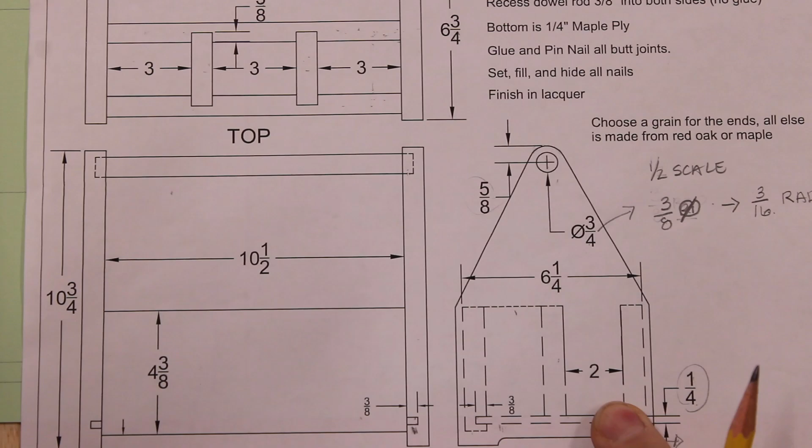I'm not gonna go into the darkening and putting down dimension lines and all that on here, because I think that part everyone pretty much gets. It's really just the techniques, and I think especially this part tends to be really tricky. That's probably second most, and that one's kind of here or there. But I think we went over most of the important parts for your exam.

Just remember, it's going to be the same drawing, but not the same dimensions, so it'll be different. So you need to know how to do your math, but as long as you know how to draw this, you know what to do.

Going around cleaning up lines, top lines, bottom lines, anything not needed. I'm just going to show how to do this on this side. I don't need that on, I'm not going to show it on this side, but I am going to do it. You do need to do it for your drawing. So I'm going to show you that you need to put that hidden line there as well.

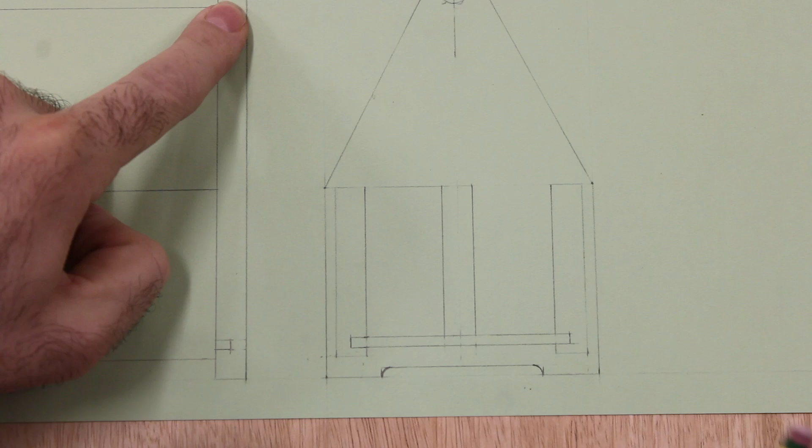Just a note, if you're looking at your drawing, make sure you get your dotted lines. So you do have to come back, and all these dividers here in this bottom panel that's shown inside, when you darken them up, they need to be dashed lines. They need to be hidden.

Now, I am going to find into my ruler there again, mark that 3/16 over. That dowel rod runs halfway through. This panel's 3/4, half of 3/4 is 3/8. We're working in half scale, so that's 3/16. We're almost finished with this right here.

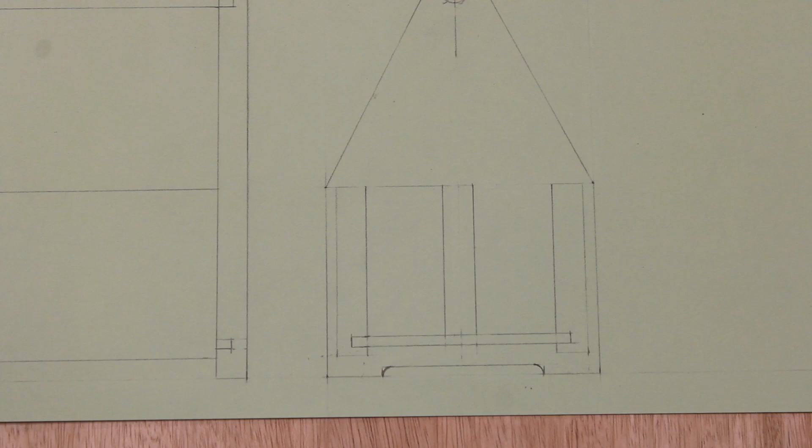Okay. And of course that part there, I would make a hidden line as well. So that's your final, and that's your review for your final. So practice these techniques and come in prepared, and good luck.